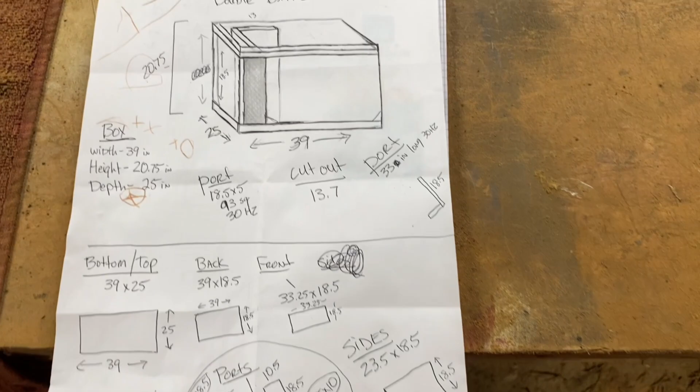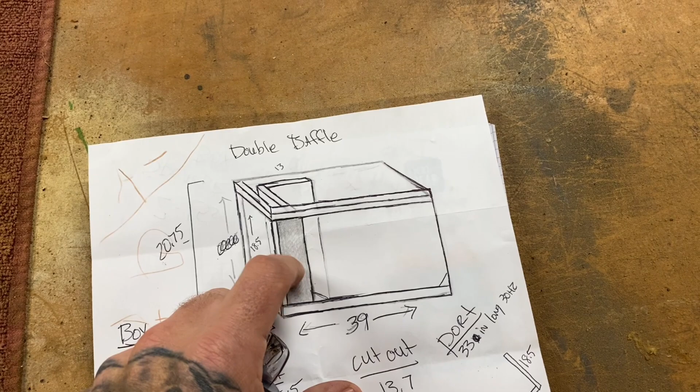Alright, here's the plans for the box. Originally I had the subs up and the port up. The port was on the end. Subs are right here. I kept running into problems. It was going to be pretty hard to build that box and double baffle it and everything. So I switched it to subs up, port back. Shouldn't be no problem. My battery bank is right here on this side. This side's open, so it should roll around, go right up into the back deck. If you've seen my build before, you know the back deck's cut out with the amp rack right behind the box.

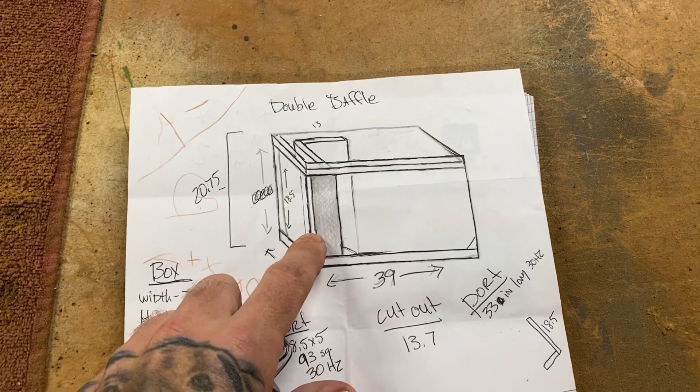The reason I did subs up instead of subs back and port back is because this box is pressure treated MDF and it's already pretty heavy. This box is gonna be a good 100 pounds alone. Then I'm adding another 100 pounds of subs, so it's kind of hard to get a 200-pound box into a trunk without tearing up the weather stripping. So I figured I would do port back, subs up, so we can get the box in, and then put the subs in once the box is in the car.

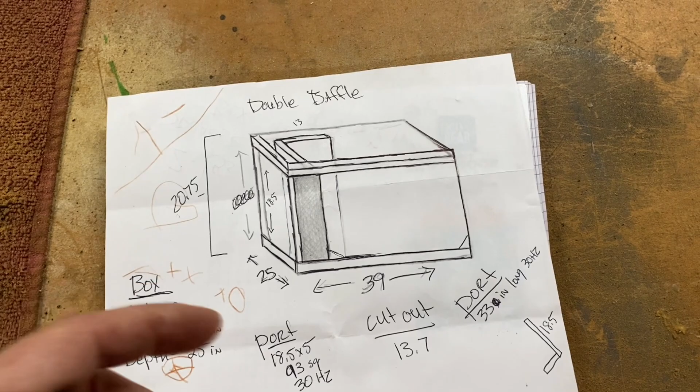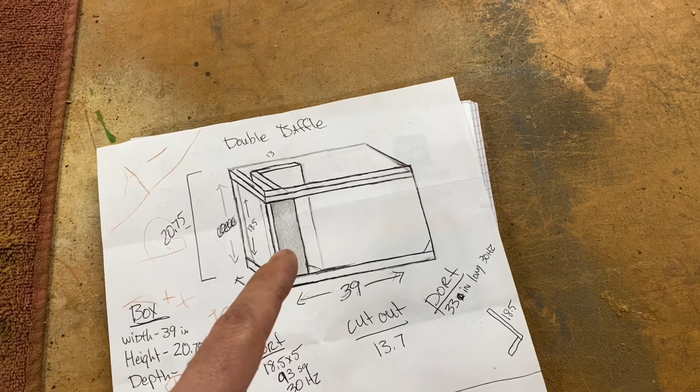That's what I've done with the last two boxes I built. Subs were on top. It was much easier. Port back, subs up shouldn't be a problem. I built one like that for a Crown Vic before, and I assume it sounded pretty good. They said it did. I never heard it myself. So it's gonna be 6.5 cubic foot, tuned to 30 hertz. And this is the wood I was talking about. It's an MDF, waterproof, weatherproof.

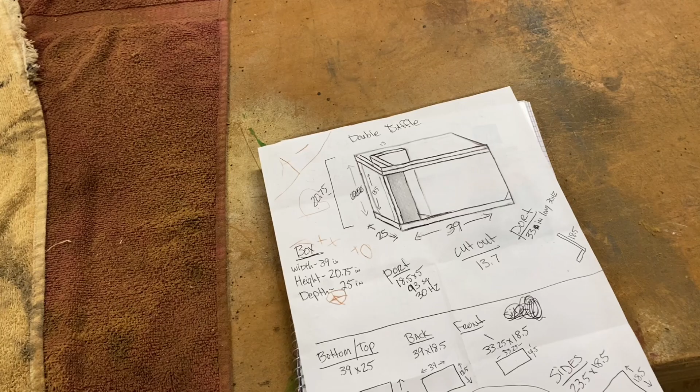We're gonna paint the box lime green with some black splatter on it. My alternator's green, my wiring's green, the car's getting painted flat black with green underglows. So I think the green box will look pretty good. All right, now we'll go ahead and get started building the box. This is where I'm at, little workshop. Yeah, it's time to get it.

All right, I got all the wood cut. I recalculated everything off of what I built. It's gonna come out to exactly 7 cubic feet, tuned to 30 hertz. I think I'm gonna raise the tuning up a little because I built the box for 2 Platinum 15s. They recommend you tune at 35, and I've heard them tuned at 35 and they still played pretty low. So I think I'm gonna do 32 or 33 and it should dig down pretty good in the mid 20s. So I'm gonna shorten the port a little, get it tuned to around 32, and it's gonna be a beast, especially in a trunk.